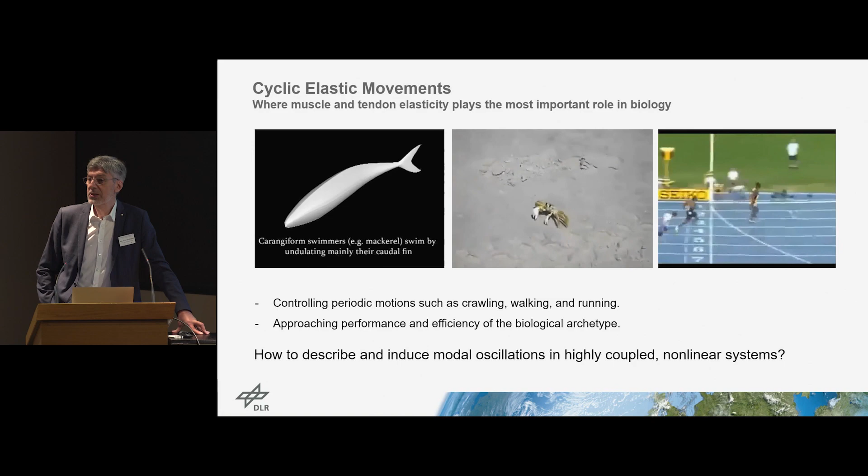I'm looking also at locomotion, but from an additional perspective of studying oscillations. Probably a big part of my research career was linked to oscillations. I started fighting them for maybe one or two decades with Alessandro De Luca and others, and then I came to the point of loving them and trying to use them nowadays.

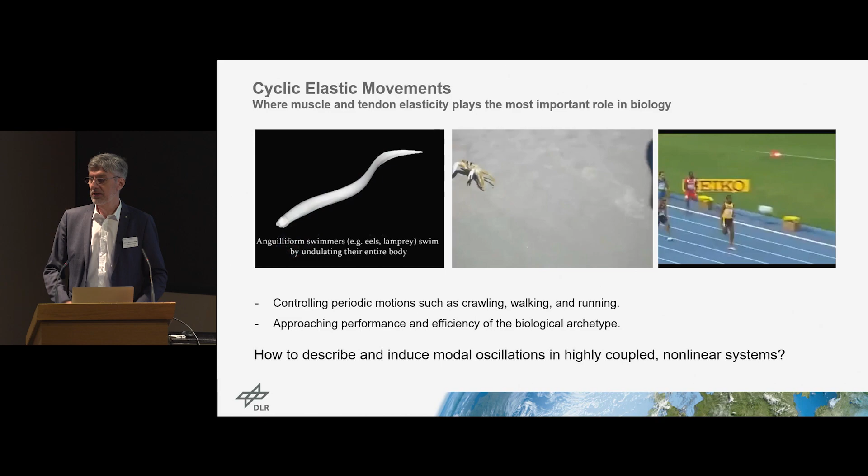Of course, the motivation is that biology exploits elasticity in order to excite nonlinear oscillations, but still in robotics I think we do not have the right mathematics to do so. So I started an ERC project, well, because I'm at the German Aerospace Center, the motivation was about space exploration. But actually the main and deep motivation is really understanding the dynamics behind, and how it can be exploited to understand biology and to improve locomotion.

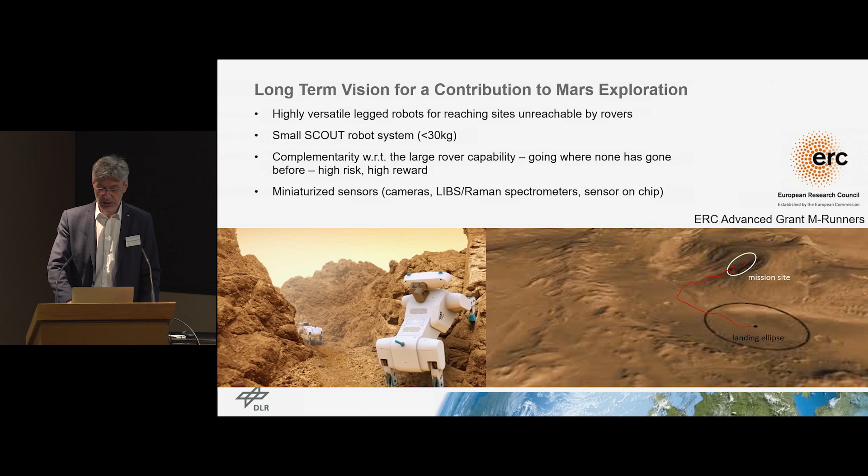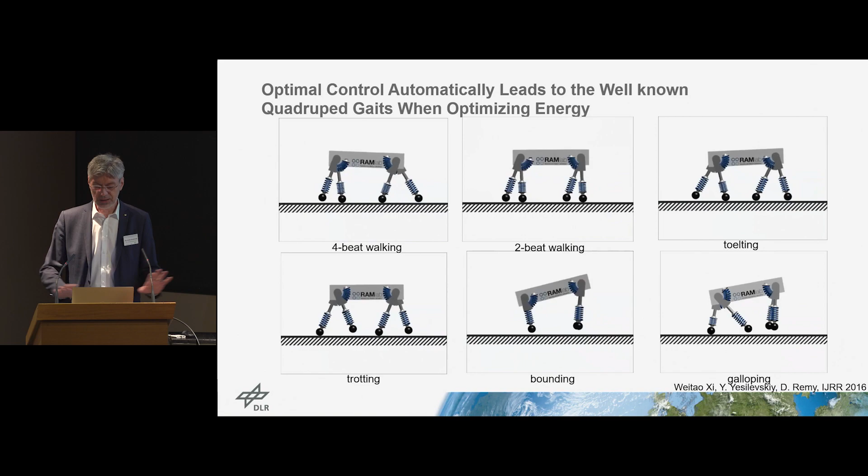There's a very inspiring work by David Remy and his group showing that if you take a model, a very simplified model with massless legs and so on, a passive model, and give it the right initial conditions, most of the gaits known for horses will emerge automatically. So they are embedded in the dynamics of the system. There's no control in here, just the right initial conditions.

This is found numerically, and well, I think I still have to stop for a second because it's going into automatic switching, and I don't like this. Okay.

The difficulty is, if we just think about rigid bodies in a potential field, we think about those nonlinear systems as being chaotic systems if they are not controlled. You can see on the left-hand side the image of a double pendulum. It is just a mechanical double pendulum, right? And we experience that also for our system.

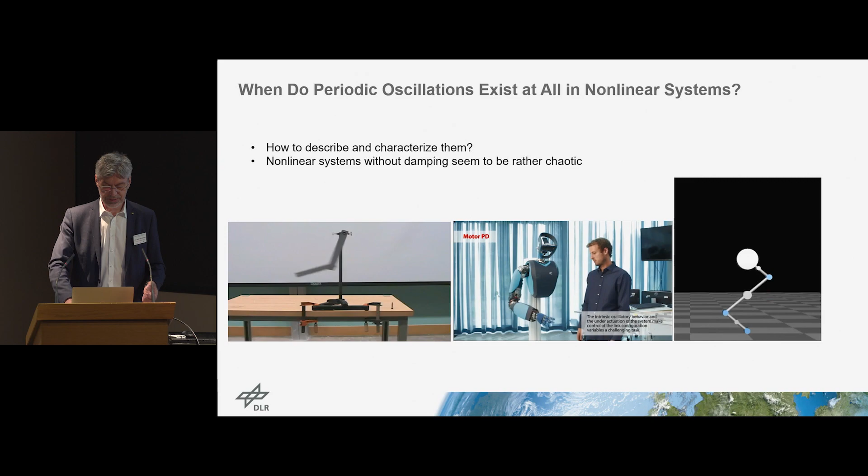So just elasticities in multi-body systems create very complex dynamics. The question arises, how is it that at the end biology succeeds to bring so much order with all these latencies in the neural control and all these limitations? The tool to study that is, of course, the analogy between muscles and bones on one side, and rigid bodies, springs and actuators on the other side.

And it turned out that what we are looking at are periodic motions which are far beyond the linear regime, because running just brings you at the limit of your actuation performance.

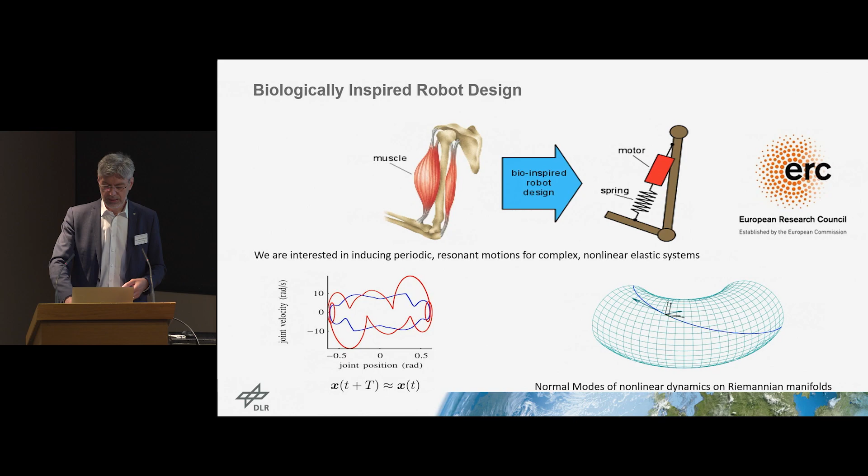And it turns out that studying this, the ideal tool is geometry, and this brings me to Jean-Paul. And in this particular case, Riemannian geometry, right?

Just to start from some very simple facts, looking at a linear oscillator, everything every student in engineering should know: the orbits in phase space are ellipses, assuming you have a conservative system. If you just look at the projection on configuration space, it's a line where you oscillate back and forth on that line. And of course, standard engineering, you can diagonalize this and then you have imaginary eigenvalues.

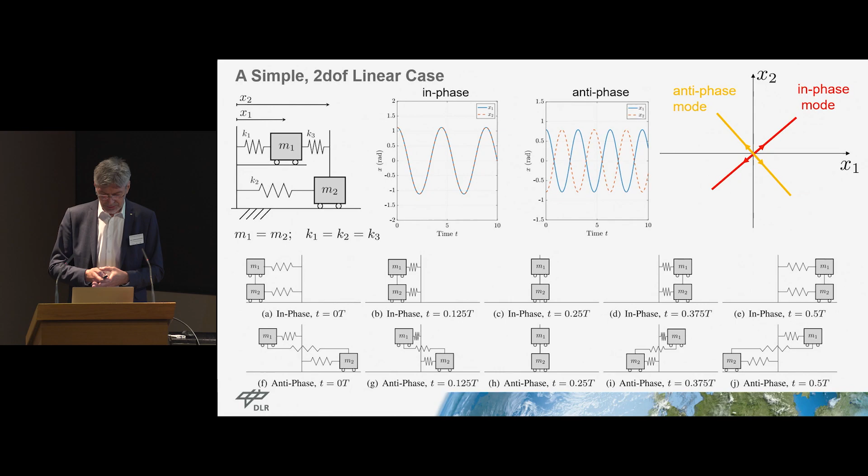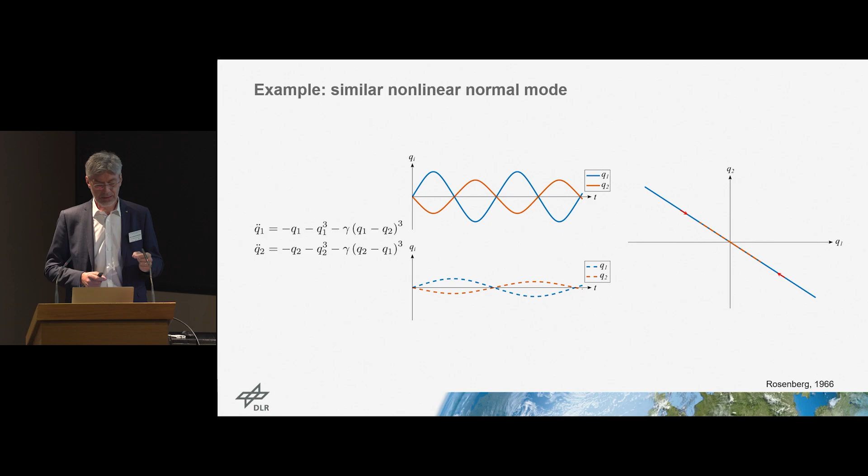So it was known since the 60s that also some nonlinear systems have those properties. For example, if you have a cubic spring, then you would have something which is not really sinusoidal, but still you will have a line, and if you initialize the system on that line, it will oscillate back and forth on that line. But in the nonlinear case, this is generally not the case.

But it turns out that you can generalize this idea, saying that in the nonlinear case, you will have a curve which, under some conditions for constant energy, if you initialize your system on that curve, it will stay naturally on that curve without any control. So it's a stable orbit. And in order to understand and study that, you need to go from Euclidean geometry to Riemannian geometry.

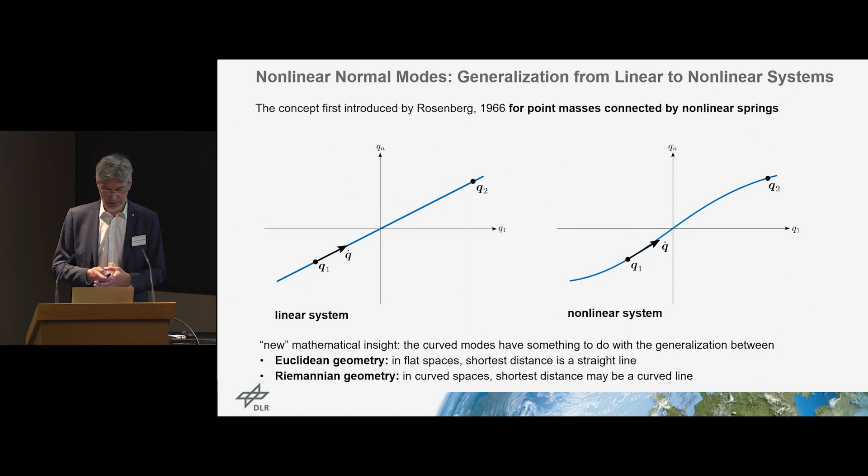There was a talk, I think in Philippe's presentation, showing that it's about the way you compute distances in Euclidean geometry and in Riemannian geometry. Just a short introduction for those who are not so familiar.

You need to go from planes to smooth manifolds. And of course, the configuration space of a robot, let's say 2 degrees of freedom, so a robot is this square where you then identify the opposed sides. Or if you would like to have it smoothly, then it's a torus, because you glue the opposing sides together.

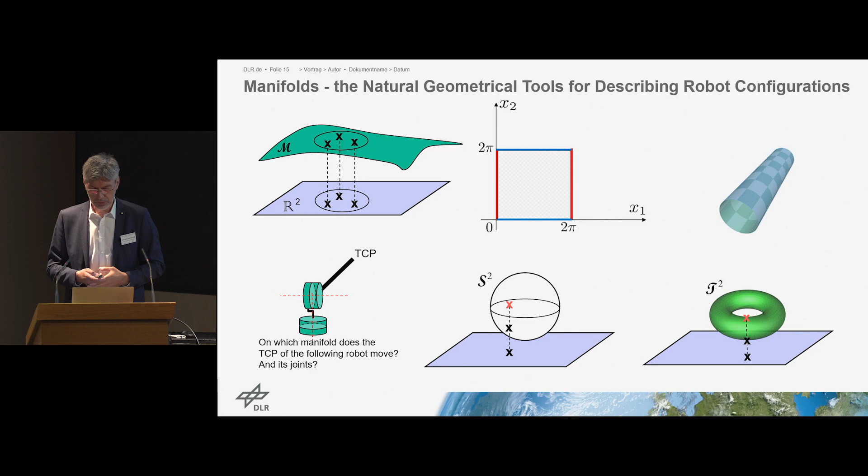So it's all about geometry and shortest path on the torus, as we will see. What's the point with the shortest path? Well, in differential geometry, they are called geodesics.

And if you search for the shortest path in a Euclidean plane, you minimize the distance over all the families of curves, and then you end up with a straight line. Whereas if you are on a manifold, for example on a sphere, there's no straight line, but you could do the same thing: taking all possible paths, minimizing the distance, and you will end up with another shortest path, which on a sphere turns out to be a segment of the great circle.

And of course, on manifolds, the shortest path is not a straight line, but what is called a geodesic. And that's why when you look at those maps of airplanes, they fly on geodesic paths and not on straight lines on the Earth.

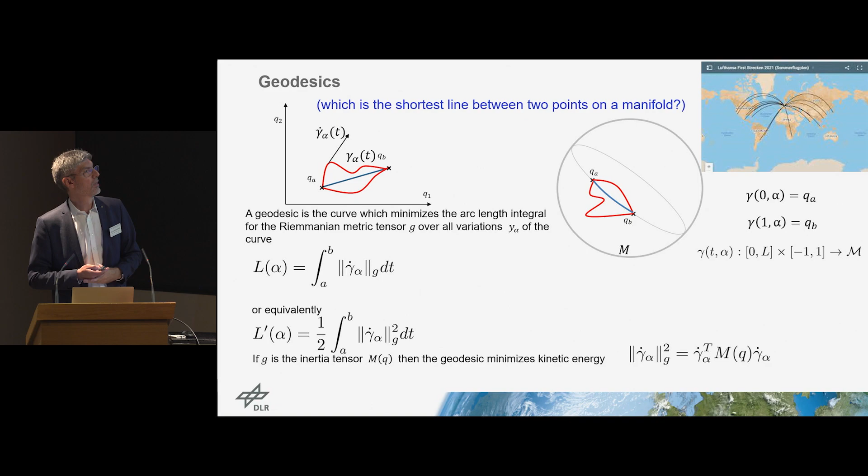And how you do that: basically you integrate the velocity with respect to a special cost function in order to get the length of the curve. So you take the velocity vector, integrate along the curve, and then take the minimum of that. And if your cost function is the inertia tensor, then this geodesic minimizes kinetic energy, and this proves to be so if your norm of the velocity is the norm given by the kinetic energy. This proves to be a useful tool to generalize from linear to nonlinear systems.

Why? Well, in robotics we all directly jump to the Lagrangian formulation of motion or to the Newtonian formulation. But actually, this comes, as we all know, from the principle of least action, which most of the time we do not really consider in detail.

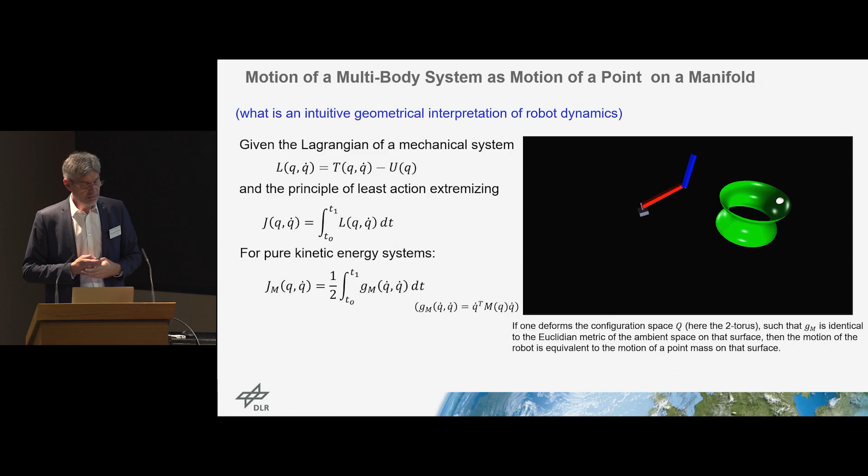What does it say? First, let's take the integral of the Lagrangian, where we ignore potential energy but just take kinetic energy. Then the principle of least action is just saying that nature is such that the dynamical system will take a path which minimizes this cost integral, which is the norm of the velocity with respect to the inertia tensor. So basically, the mechanical system is following geodesics with respect to the inertia tensor. So trajectories of freely moving multi-body systems are geodesics with respect to the inertia tensor.

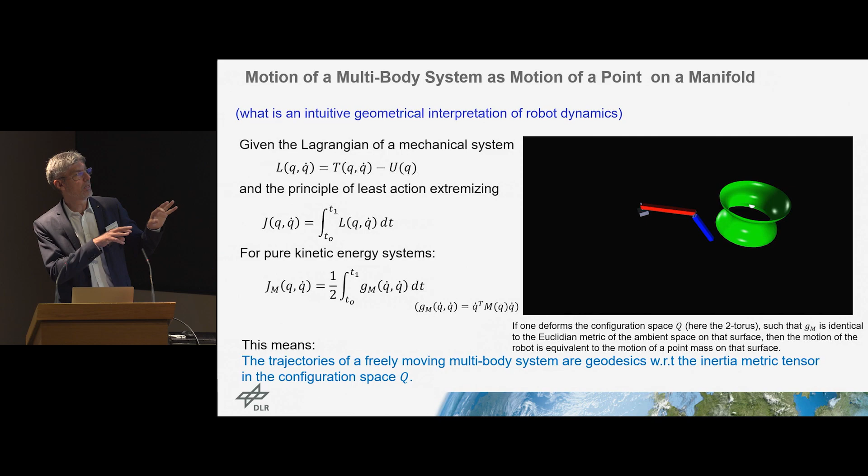And basically, this means that you can reduce for constant energy dynamic planning to pure geometric planning. So you can have an analogy between a double pendulum and a point mass moving on a surface of appropriate shape. And basically, you push all the dynamics into geometry, and at the end, you have just Newton's law of a point mass on a surface, right?

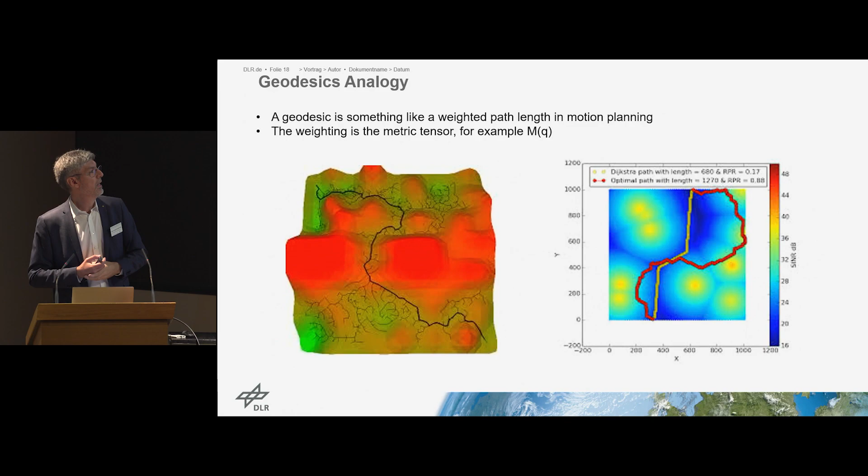Well, this is not new, but it might be interesting news for people used to do motion planning, because they are used to do motion planning with cost functions where the shortest path is not a straight line. Of course, they have different cost functions for obstacles and so on, but just imagine taking your mass tensor as a cost function, and that's how you could plan those motions.

Then you will ask what happens if you add potential energy. Actually, this is something I was surprised that in robotics is not so widespread, but in mechanics, Jacobi introduced that - not the Jacobi matrix which we all use, but the Jacobi metric. And you can do the same thing with a new metric tensor, which is just basically kinetic energy times the mass matrix. So it's E minus the potential energy, which is the kinetic energy.

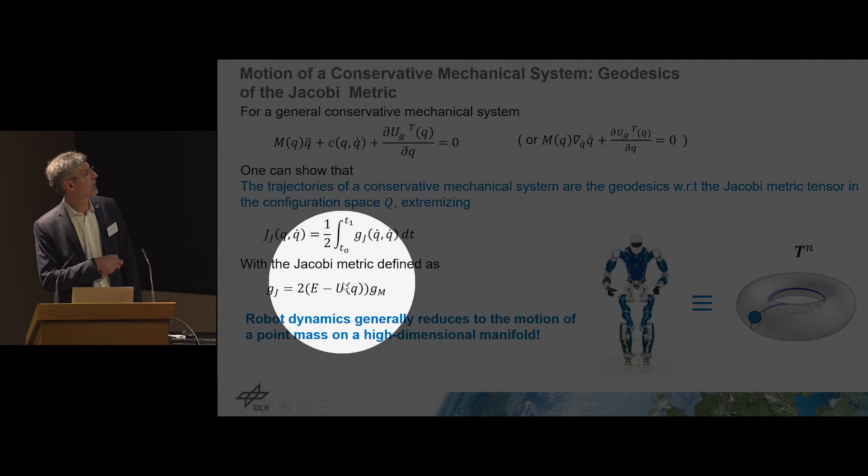And for historical reasons, there's this too. Meaning that if you have the general dynamics equation we know, robot dynamics generally reduces to the motion of a point mass on a high-dimensional manifold if you are in the conservative case.

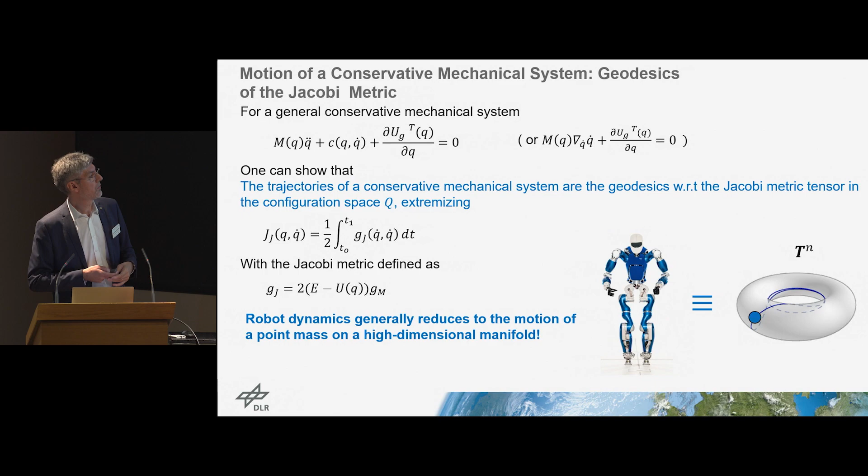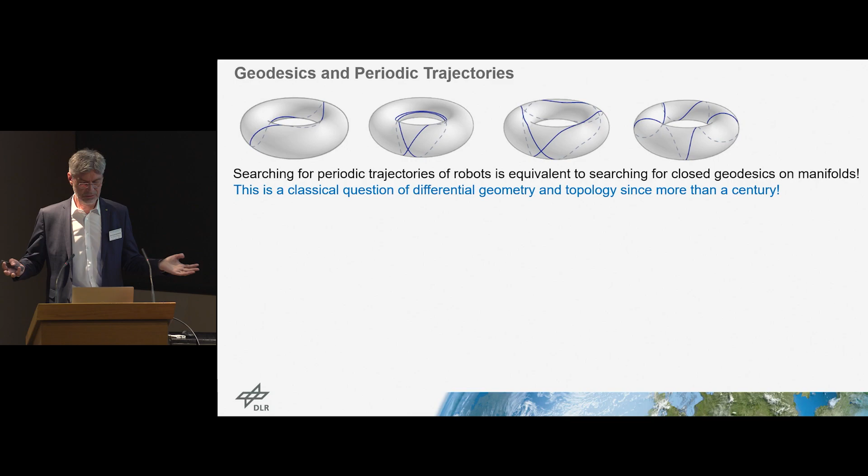And that's interesting, because this brings you - I don't know if here at Collège de France we have mathematicians or theoretical physicists, but people doing differential topology, differential algebraic topology and differential geometry study geodesics on different types of curves, and there's hundreds of years of mathematical results about this kind of systems.

And the first time I came across that is maybe 15, 20 years ago in the book of Arnold, where he shows just this picture, showing for every two numbers, n and m, you can find a trajectory of the double pendulum which rotates n times around one axis and m times around the other one, right? And just by contracting rubber bands, so instead of shooting like we're doing in optimization, you just contract rubber bands and compute the shortest path, right?

Which is very interesting. And I asked last week, for today, one of my PhD students to just contract for the double pendulum this kind of 1,1,0,1 and so on trajectories. This is how they look on the torus, and this is how the dynamics looks like. So indeed, you can find them, and you need almost no energy to stabilize.

So we have seen this double pendulum, which is unstable. You can find some orbits turning once around one joint and no time around the other one. You can find even more than one, but those mathematical theories guarantee you the existence of at least one solution, which is different from the Poincaré map or other shooting approaches.

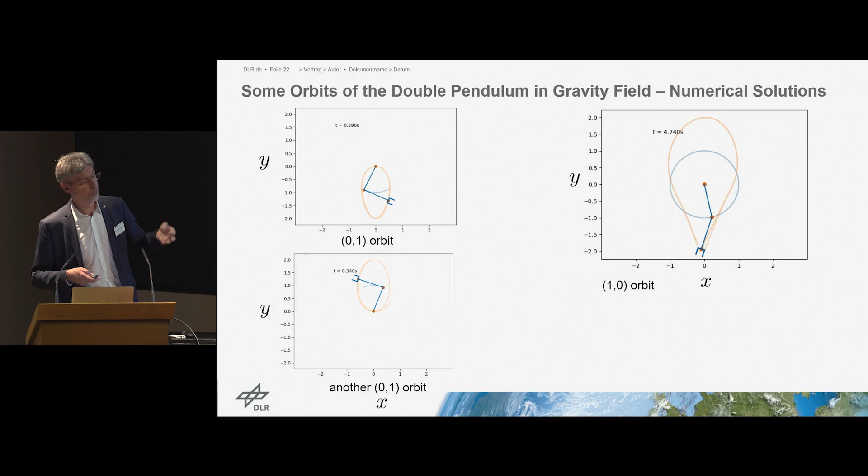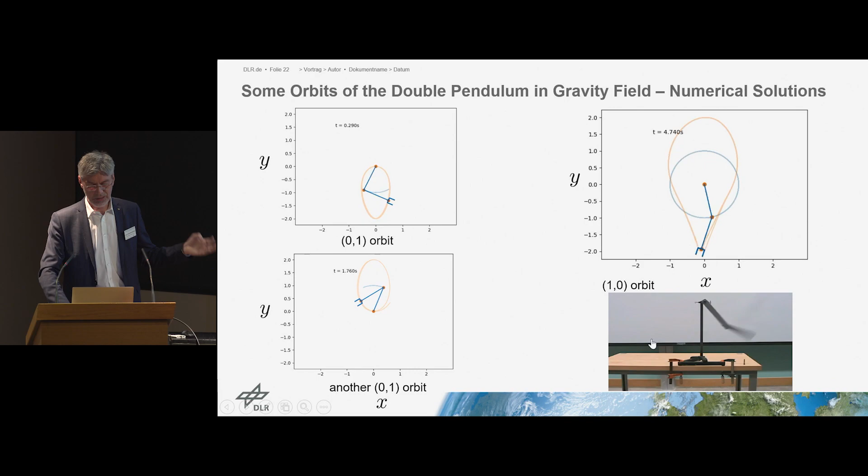And we remember this video I've shown at the beginning of being chaotic. Yes, the system can be chaotic, but it can also be very regular, actually behaving like linear systems. And that's the interesting insight I've got out of this.

And well, these are this kind of circular paths. So just take a rubber band, wrap it around the torus, then let it contract with respect to that metric, and then you will get an optimal trajectory which needs no energy.

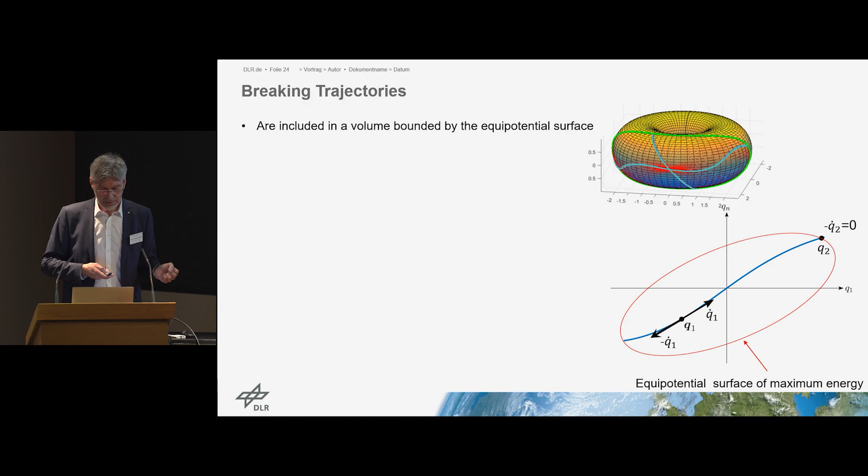But you can have two types of periodic trajectories: the circular type as the one presented, and then this kind of line type. These generalize the eigenmodes of linear systems. And mathematicians call it breaking trajectories, because you move back and forth, and brake and stop at one end. Well, let's go very quickly through that.

But actually, there's a conjecture which is still not proven, by a mathematician from Heidelberg called Seifert, which says that for every classical conservative mechanical system that has an equipotential line and equilibrium, you will have at least as many this kind of periodic orbits as degrees of freedom. He could prove that there exists at least one, but he conjectured that n exist, and I'm still in contact with mathematicians trying to prove that with higher and higher generality for our case, right?

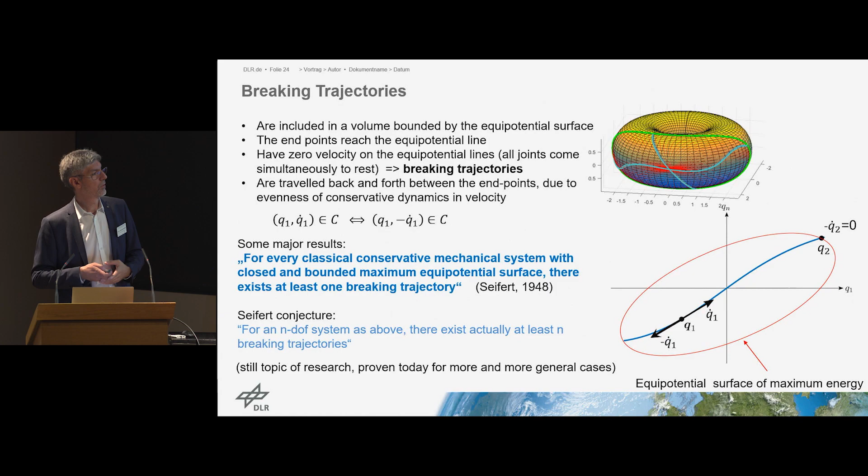Now the question is, when is this the case? I'll go into a little detail. Assuming you have a curve, you'd like to ask yourself, can I make this curve an invariant manifold for the system without control, just mechanically? We published a paper with a PhD student of mine and Stefano Stramigioli, showing that the condition for this is that you make this curve a geodesic of the multi-body system, and the acceleration due to the potential is tangential to this curve. That's a necessary and sufficient condition if you'd like to turn any curve into an invariant manifold.

A very trivial example is this one: hopping in place. Because of the symmetry, you can hop higher and higher, and the system, although coupled and nonlinear, will stay on that manifold.

But it turns out that in general, if you take a double pendulum or a full robot, this nonlinear curve won't be invariant for every energy. If you take another energy, the curve will deform.

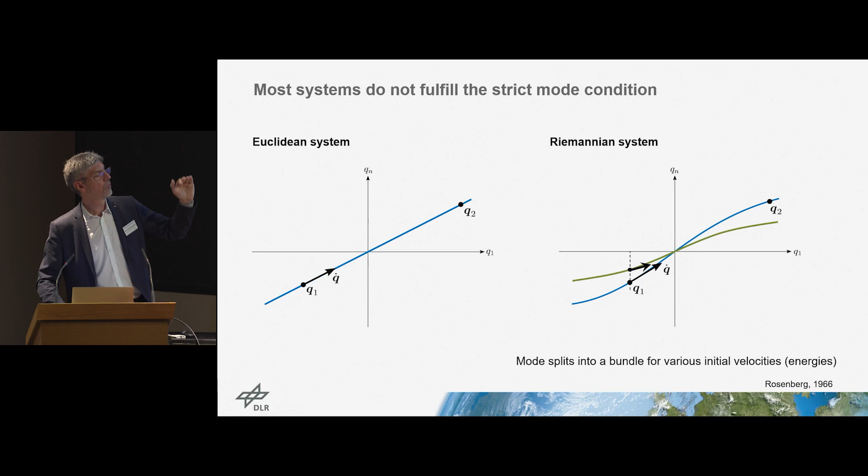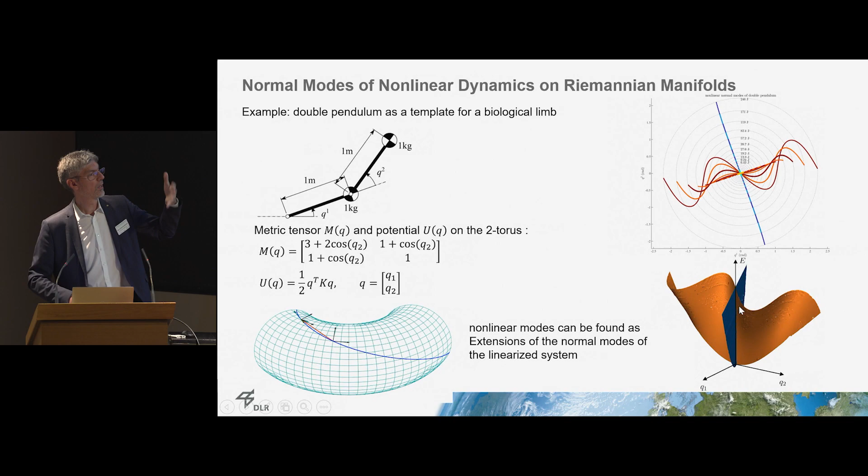Just as an example, take the double pendulum, and this is how those modes look like. The small crosses are the linearized eigenvectors of the linearized system, and as you increase the amplitude, you will always still find oscillations. We have a MATLAB toolbox which gives you those oscillations, but they tend to bend and curve. This is a representation in 3D: at small amplitudes you have linear oscillations, and as you increase the energy, you will still have periodic motions, which is very interesting.

This is how they look like, for example, for a double pendulum. It very much looks like an arm, with an antiphase oscillation. You remember the two masses, and the in-phase oscillation, and you can imagine some throwing motion or some locomotion based on those eigenmodes. Again, it's natural, and it does not need any control other than stabilization.

Very quickly, I hope I could give you an overview that initially, we thought searching for this kind of periodic motion with Poincaré section optimization was like looking for the needle in the haystack. But now it turns out there are plenty of needles in that haystack. There are even some theorems guaranteeing you that there are plenty of needles. And there's also some structure. There are different types of needles: circular-shaped periodic orbits, breaking orbits, and what we call strict modes, and so on.

So I thought I would research that for 6 months and then start building robots. Now, after 2 years, I'm still digging into it, like Alice in Wonderland, where they go down the rabbit hole, and then it gets bigger and bigger, and the whole field of mathematics opens up. I'm just trying to bring this closer to our robotics community. I think it's worthwhile looking into that.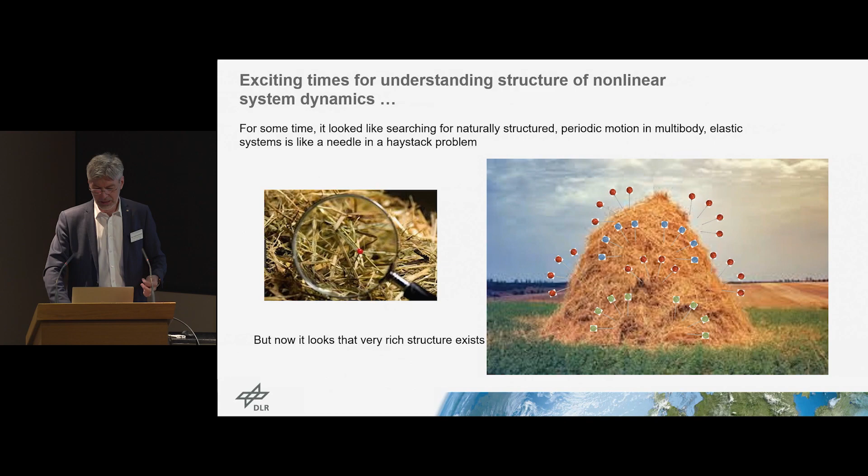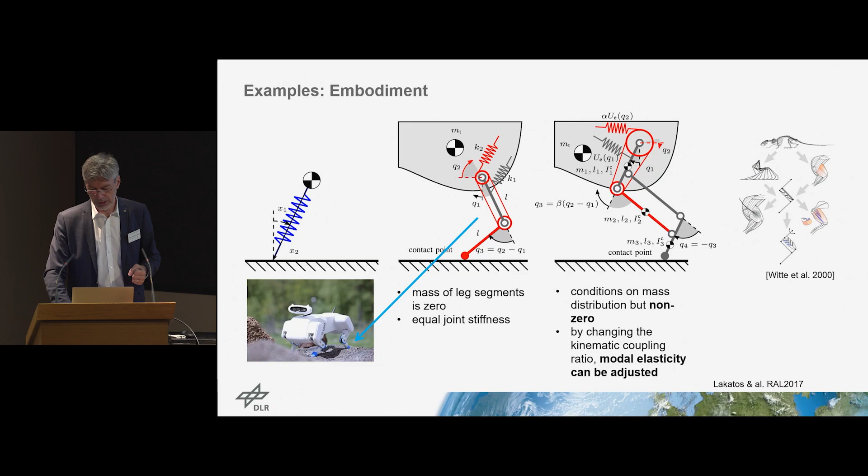Still, some results, some practical examples. If you know about those modes, you could first try to design your mechanics such that those modes, or what you'd like the robot to do, are embedded mechanically into the system. One of my PhD students, Dominic Lakatos, compared this two-segment leg with a pantograph structure, and he could show that if you'd like to embed a vertical mode, which is just hopping, then the pantograph is much better, because the other one only works with zero masses in the links, while the pantograph works for general parameters. This might be an explanation for why biology uses this pantograph structure very often in legs.

This is a simulation showing that if you choose the right distribution of stiffnesses according to the theorem I mentioned, you can have a system which naturally springs vertically without any control, while with the wrong parameters, it has this chaotic behavior we are used to expect as engineers.

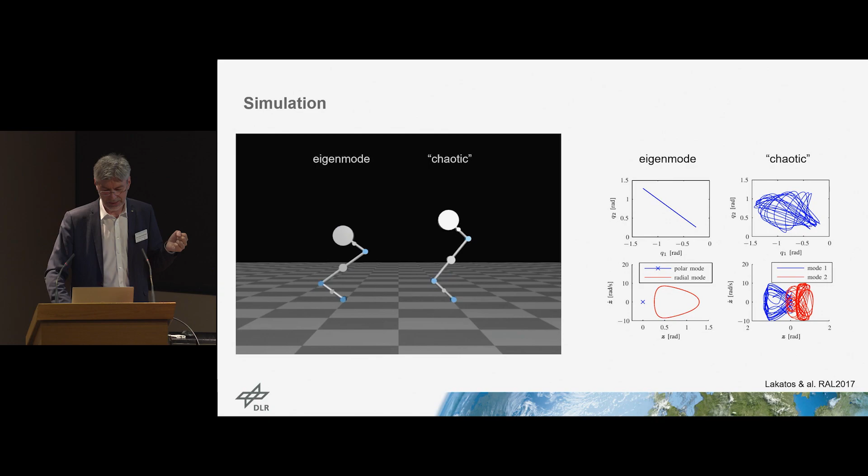Now we are designing a prototype of a quadruped. Good question after Marco and Boston Dynamics having such fantastic robots, why still build robots? But for me, these are templates for studying these motions. This is a 12 degree-of-freedom robot. The legs are fixed to the ground, with 6 constraints.

So you are left over with 6 degrees of freedom, and these are the 6 modes of this elastic quadruped. It has springs in every joint. And then you can start with your imagination and ask yourself, is it running? Of course, we did not design it for that. It just has equal springs in all the legs.

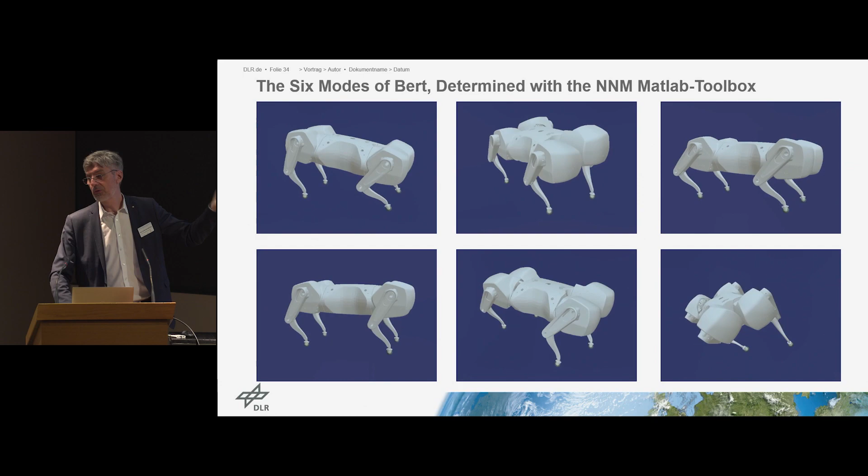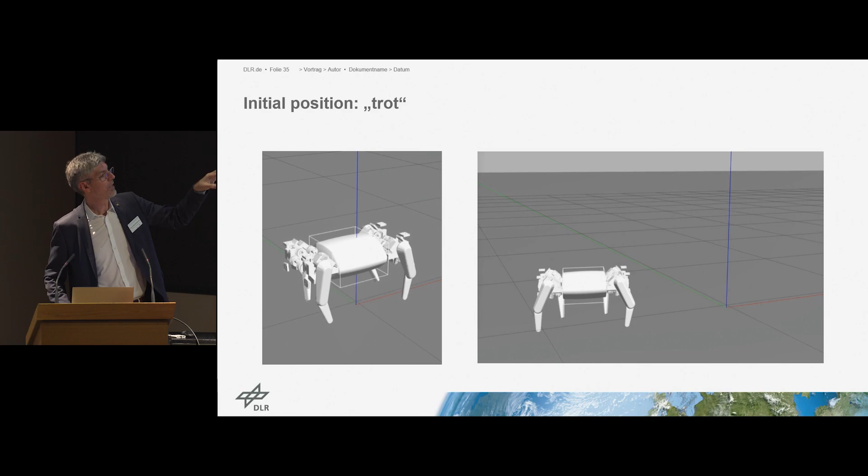But we have a MATLAB toolbox. You feed in the dynamics of the system, and you get out the results. Interestingly enough, if you detach the legs and excite those modes, the system starts doing steps. This is an interesting one, this twisting, shaking. When you detach the legs, it starts basically doing some walking motions naturally, right? Still, there's hybrid dynamics. This theory is not extended to hybrid dynamics for all these cases.

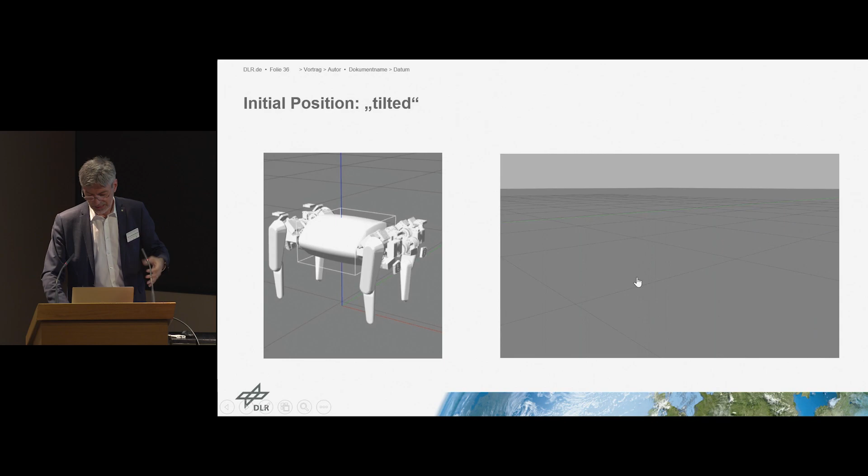So still a lot of work to be done, but I think it's an interesting way. And they are, by the way, very easy to excite. So that's our prototype, just 3 weeks ago set up. You just take a bang-bang controller, Pontryagin principle, as we heard before, and you can easily excite those modes. And we are doing first experiments.

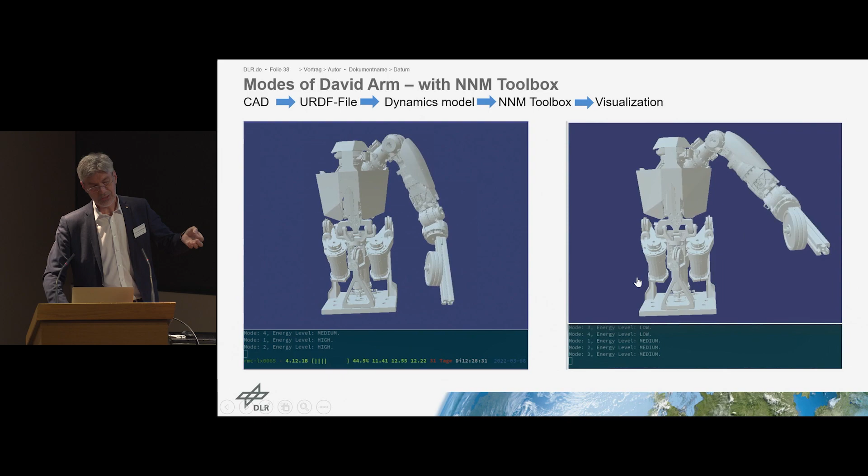And again, we have a toolbox. You can take any elastic robot, like our humanoid, and then try to generate some throwing motions based on those modes. It's going much faster because you are optimizing just in an n-dimensional space. So velocities are irrelevant. It turns out that you just need to optimize in the configuration space.

Well, then just 1 or 2 minutes on the control. What we have done with Alessandro and many others for years is control with a lot of control authority, every millisecond commanding torques to stabilize. This is a mode of a swing. What people are doing is just letting it swing its mode and just injecting at the right time a little bit of energy to compensate for energy losses. So this is the idea, right? Just take the natural dynamics and just give it some kicks at the right time and let it swing, right?

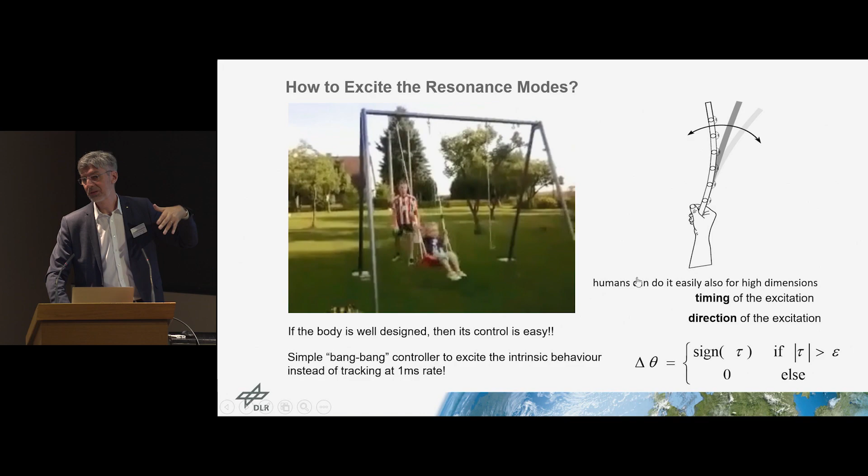And humans are very good at that. I give you a rod in your hand, you will excite a swinging mode, although it's a complex system, within seconds, right?

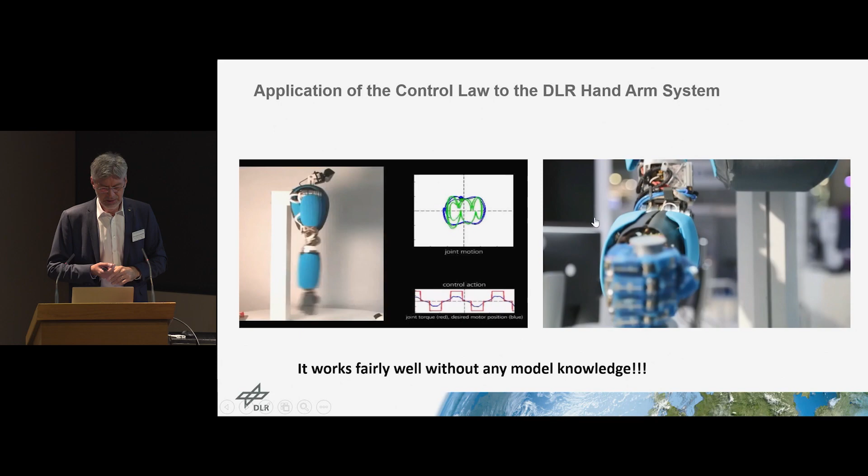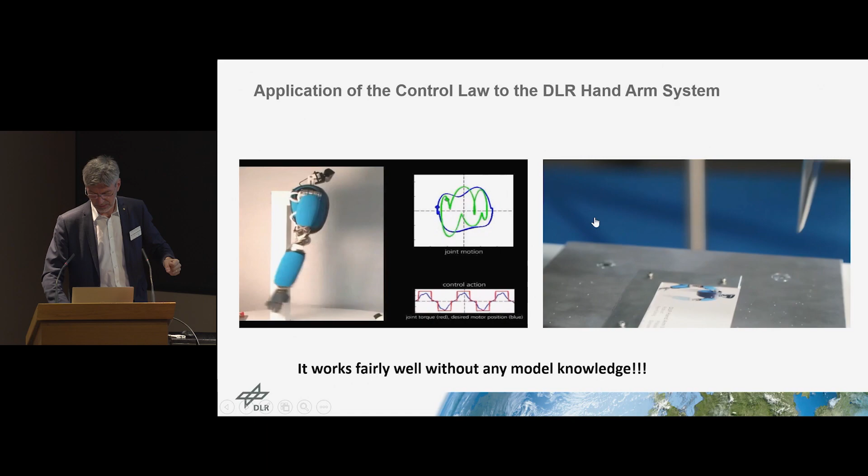Well, I don't have much time to go into the control of that, but using this bang-bang controller along the modes which we pre-computed, it turns out that it's easy to excite those modes, even in contact dynamics where the robot is hammering against a surface. And even with some objects which you have never known, these are this kind of gymnastics rods. I don't know if you know them. And then you are asked to excite them in resonance, and the system quite easily identifies those resonance modes.

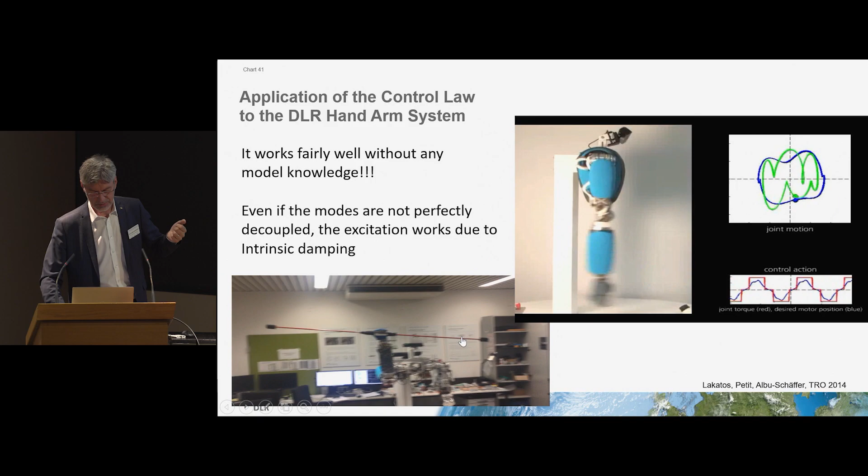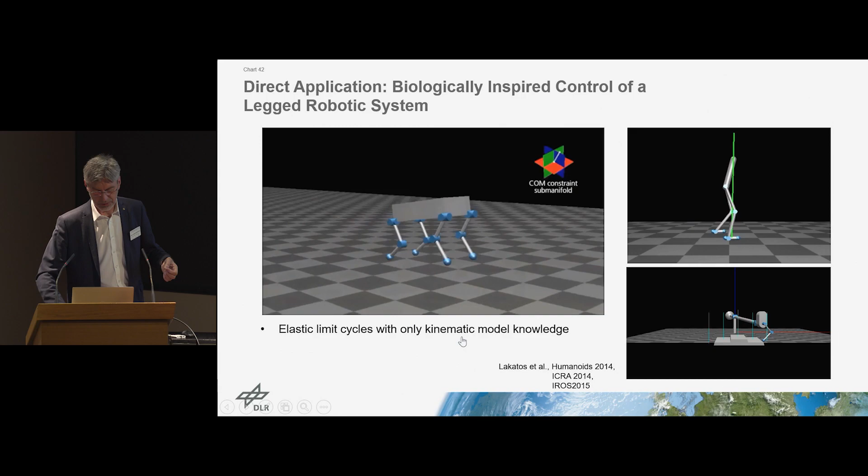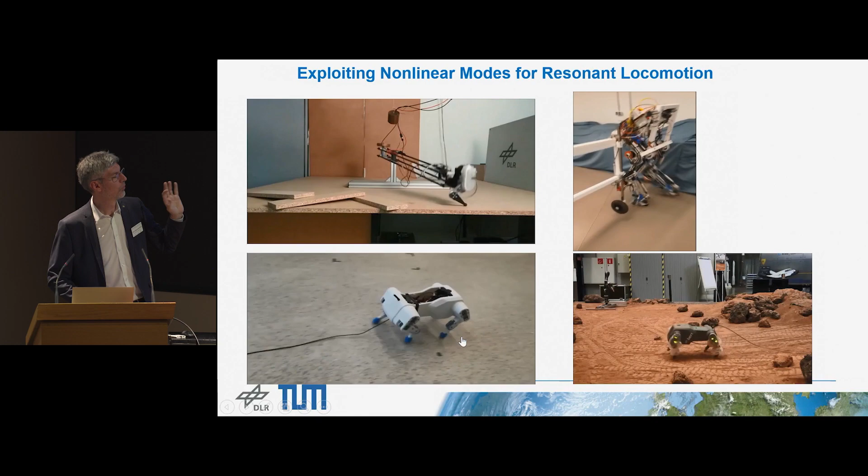And well, these are steps on the way to a robot which locomotes in those modes. We applied that to different models, and some preliminary results on our hardware. For example, on the white robot over here, we have three locomotion patterns which are, well, they are not perfectly on the theory. I'm still working to have exactly proven that we excite those modes, but close to that, and we had some gaits on walking, trotting, and bounding, exploiting the resonance of the system.

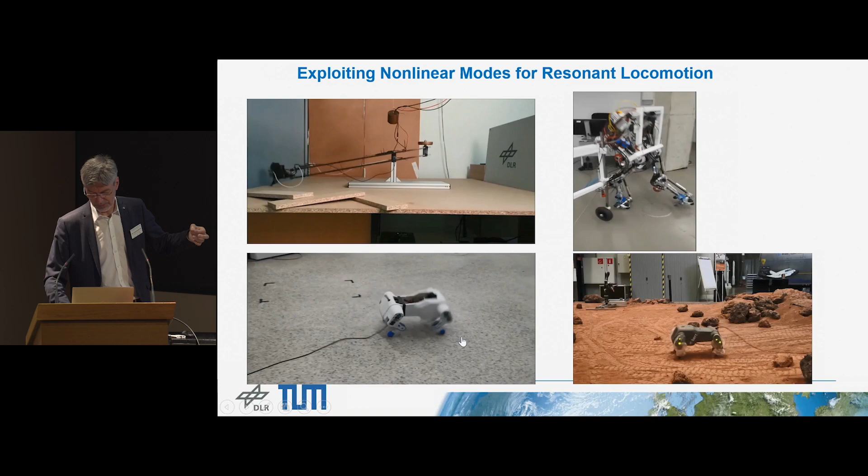So I shared this view with Jean-Paul of studying biology, trying to understand basic principles on biomechanics, control, but also neuroscience, building robots, and then use those robots to validate those approaches, but also to build better robots. That's the particular thing about us in robotics. Of course, behavior of humans is studied by many disciplines, but what we say is, what I cannot create, I do not understand. So we really want to prove that the understanding of motion is as good as to allow replicating technologically those approaches.